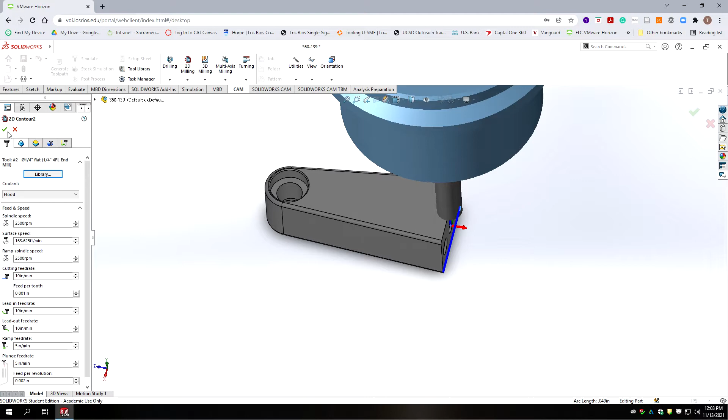Now the last features are we're going to buzz around the outside of the profile to remove material. Corner rounding end mills don't work too well, they only need to take off a minimal amount of material. So we're going to go in with this end mill and make a sharp corner for it to remove. Now the tip on our corner rounding end mill is 1/4 inch, same diameter as this cutter. So that profile will have to be spaced off a little bit, otherwise both sides of the radius cutter will be cutting on the right and left of the part, and we just want it cutting on our part.

We're going to go 2D milling, do a contour, and we're only going to cut the depth of our fillet. We want to leave the rest of the block square so that we can hold onto it. If we cut part of the way down, we'll have probably a witness mark. So if we cut the bulk of the steel from the opposite side, then it'd just be a blending thing on the radius itself.

Okay, so we're going to go to heights, and we're going to leave the first view at default, and we're going down to the contour. Let's take off 0.005, and what that will do is make sure that the very tip of the corner rounding cutter isn't touching. So we're going to do wear compensation.

We're going to do roughing passes in XY. I want to leave a substantial amount of material to remove. So our roughing passes are still going to be 0.03, but let's do 3 of them. Okay, and that'll leave a sizable channel on the one side so that the corner rounding end mill isn't cutting very much on the scrap side.

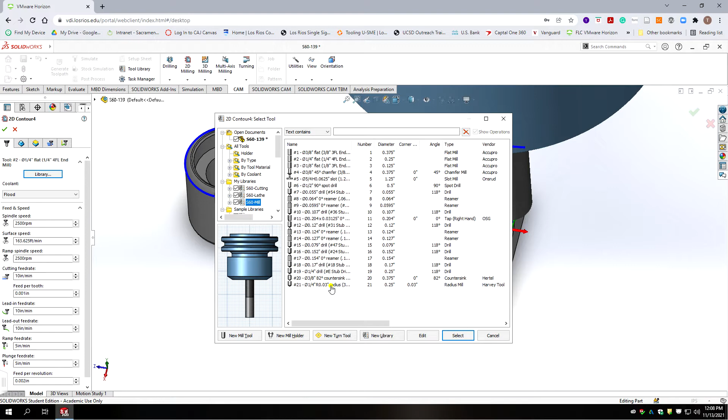Okay, so our last profile is our corner rounding end mill. So we're going to go 2D contour, we're going to select the same profile we had, but we're going to switch to our corner rounding end mill from our library, which is tool 21. Looks like we can leave the RPM where it's at.

We're going to stick with all our heights, we're going to go from stock top to the contour, we're not going to adjust any of that. We're going to use wear compensation.

Okay, and we're not going to do multiple finish passes, but we do want to put a finish pass of 0.005. Rough passes, we have to do at least one rough or we're not going to end up with anything, and we're going to just do a rough pass of 0.01. Okay, a finished pass of 5 thousandths and a rough pass of 10 thou. We're just trying to take off a little bit of the corner first before we come in with the final finish. We're only going to do one.

We're not going to do multiple depths, and we're going to turn on smoothing.

Okay, we're going to go to our next one. We're not going to do a vertical arced lead-in, and we're not going to do one that's horizontal either. We're going to come in at 0 and increase that to 0.1, so we have a lead-in that's straight coming in from the outside edge.

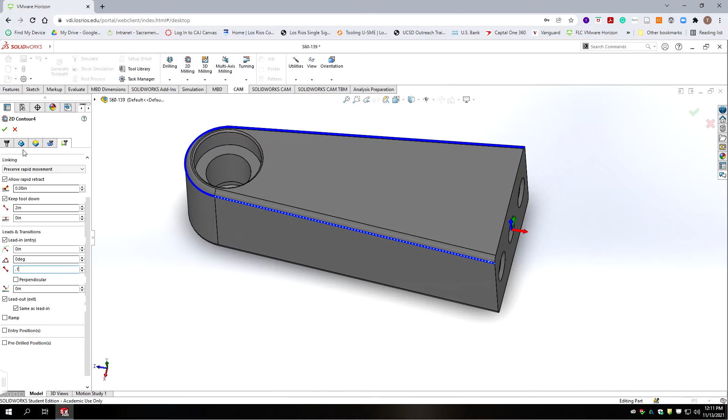Okay, we're going to accept that. And we have 2 passes, at full depth, 1 rough and 1 finish.

Alright, so let's see what we've done so far, done on our first side. So let's highlight our entire operation and do a stock simulation.

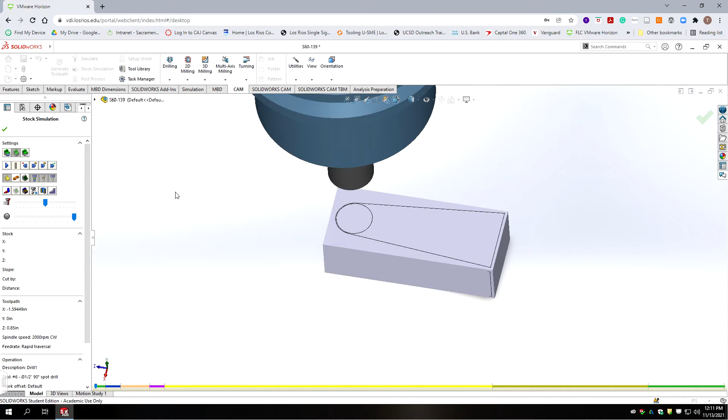Okay, we come in and do our drill. We come in and do a counterbore pocket. We do a finish on that pocket. We're machining the end.

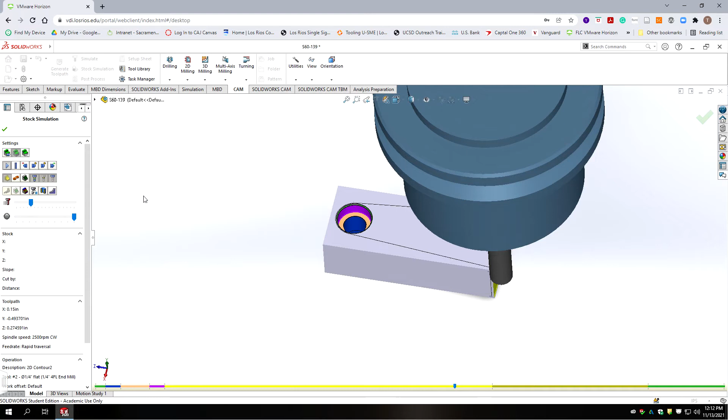I could probably be a little more aggressive there. So then it's rough cuts at the end.

Looks like it detected that my end mill flute length wasn't quite long enough. Comes in and does our radius.

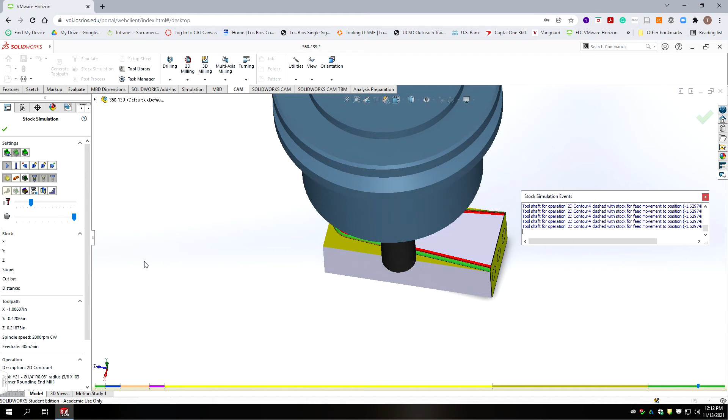Okay, so we've just finished the first side and we're going to flip the part over. We're going to use some of the same routines that we used on the first side.

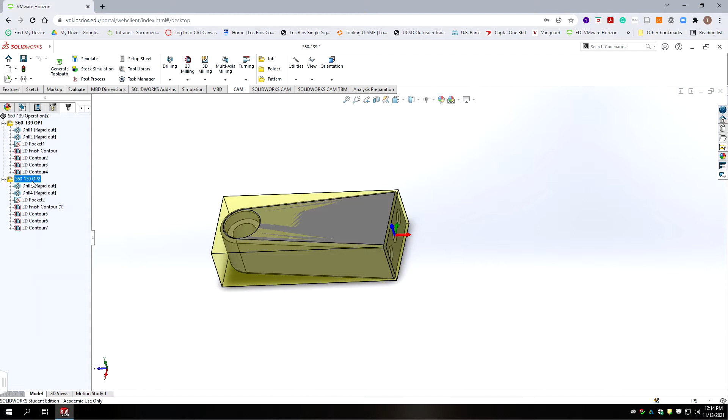So what I would suggest we do is duplicate this setup. We'll right click on it and duplicate the entire operation. Then we're going to go in and change the parameters, since this needs to be op 2.

On our stock, all sides, we're continuing from the previous job. On the right hand side, we don't have any extra material, so I believe that's the plus sign. If we set that at 0, we now have it at the size the block currently is.

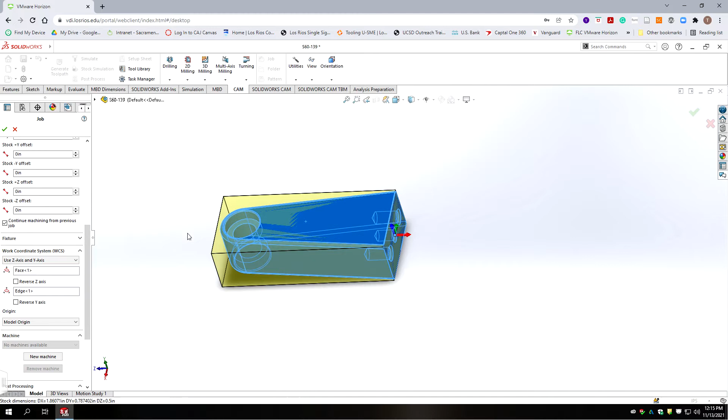Okay, now we do need to change the faces. So we're using Z-axis, and we're using the opposite side of the part as our Z-axis face. Our Y-axis face is the edge on the right.

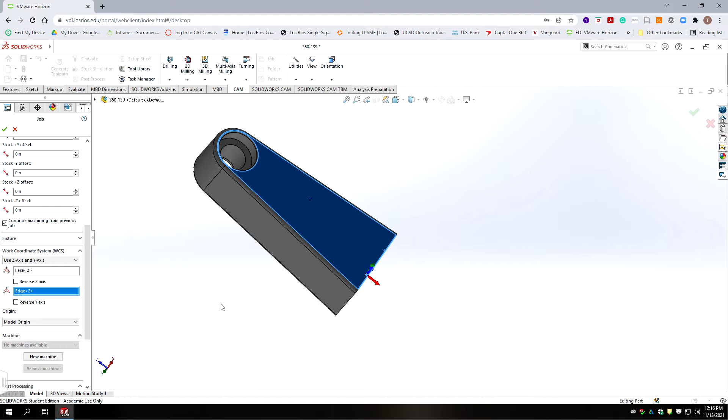And our origin from now on, we want it to be a milled feature. Because the main focal point of this part is this bore here, I would want my fixture to be picking up on the center of that.

Now, it doesn't appear that I can select an origin without creating a point there. I'm going to exit this stock for now, and I'm going to go to sketch and sketch on the plane here.

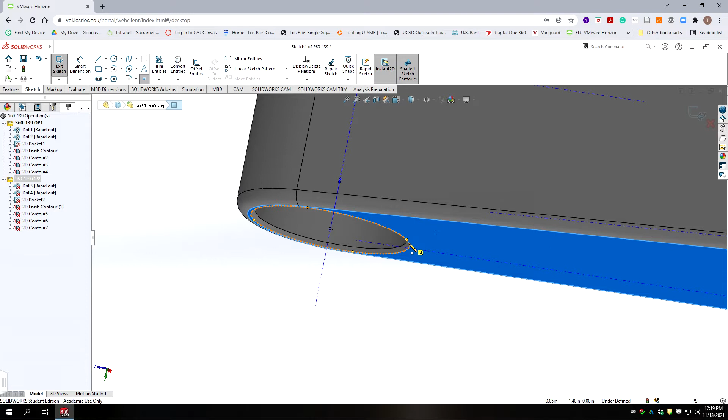I'm going to create a point and I want to pick up on the center of this, the center of the arc here that's on the bottom of the part. And if we select that center point, we can create a point.

Okay, I'm going to hide my temporary axes. And I've created now a point I can select on.

Okay, so let's go back to CAM and exit this sketch. It's asking if you want to regenerate anything. Just go ahead and hit yes.

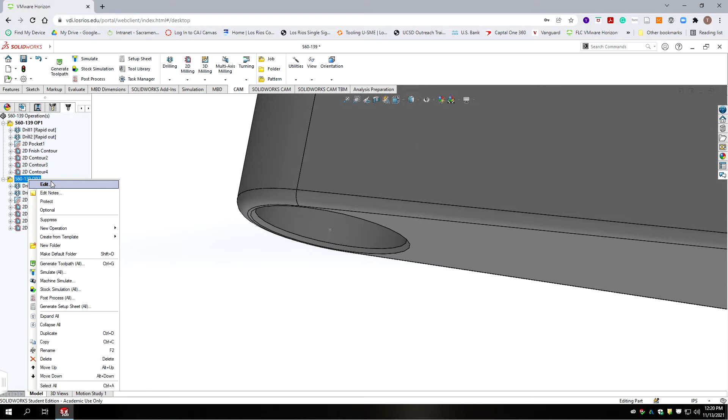And we're going to go back into our operation. Okay, I'm reselecting my model. I'm not sure why that wasn't selected.

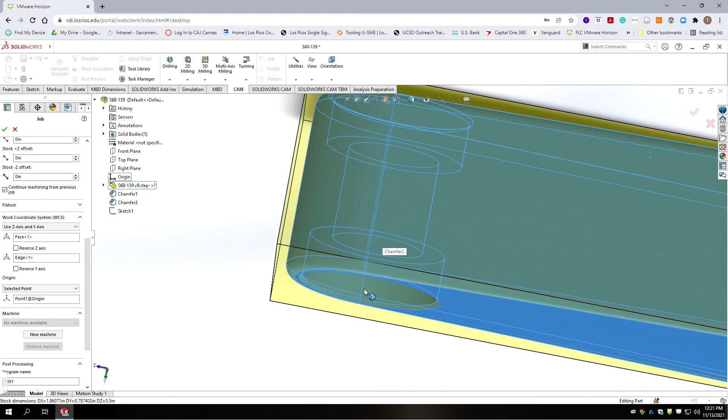Okay, so we're going to keep it on relative size box, but again we took off the point on the end. And now that we have a point, I can select the point I created in my sketch as my point of origin.

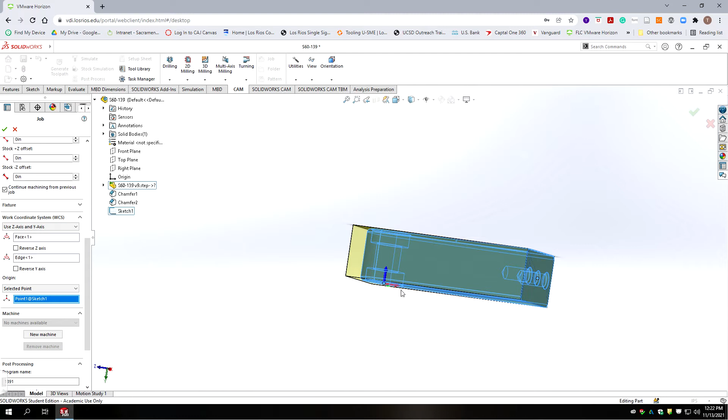Okay, so the bottom center of that bore, I can make a locating feature on a fixture so that it locates it with the origin there, and then I would use the end here that's been milled off square as our second fixture point that would lock this in place for this operation. So that way we're controlling the concentricity of the bore on the opposite side to the center of this other feature.

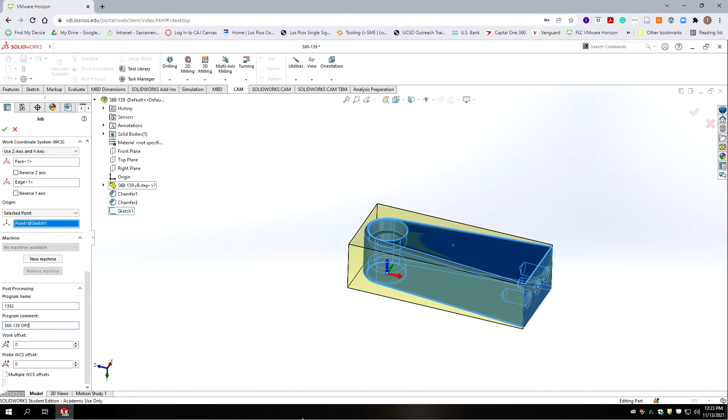Okay, all right, so now scrolling down, we're going to call this 1392. It's the second program. And our program comment should be S60-139 op2. We'll leave it at that. We'll hit OK.

Okay, so now we're going to work on these routines. So they're all drilling in from the opposite side because the program was on the opposite side. And we're going to keep the countersink geometry.

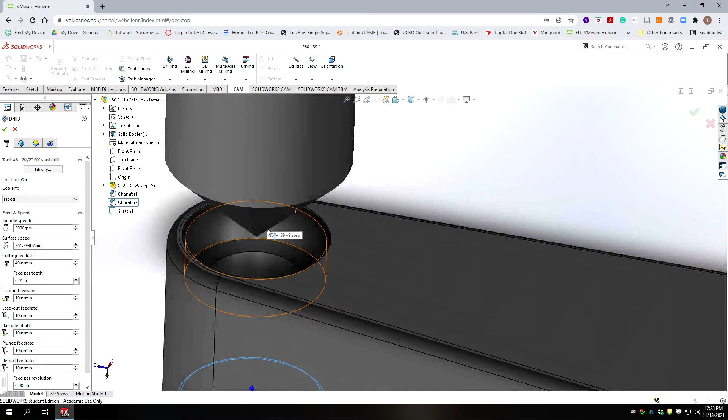So we can go ahead and select that, and we select the countersink on the opposite side. And we're going to get rid of face 1, so we're just drilling on face 2. So we accept that. Now it's really just putting the chamfer in.

We've already got the 1/4 inch holes drilled all the way through, but this will add this chamfer lead-in that helps the bearing press in. Okay, and we don't need the 1/4 inch drill, so we can delete that routine.

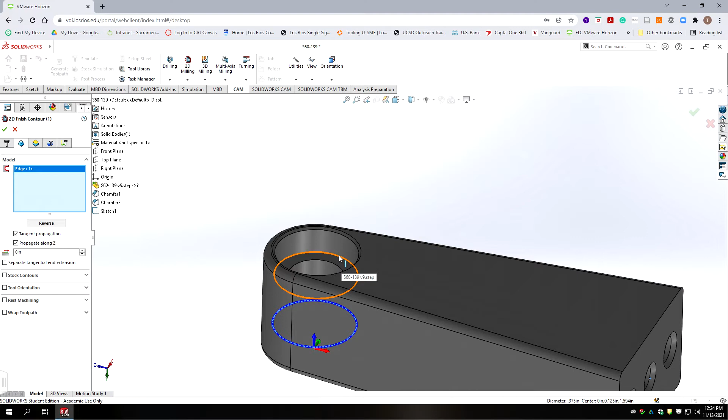And then we have a pocket command, so we're going to recycle that. We're going to go edit. And then we're going to do the same thing with our finish contour. We're going to delete the edge we have. I want an edge.

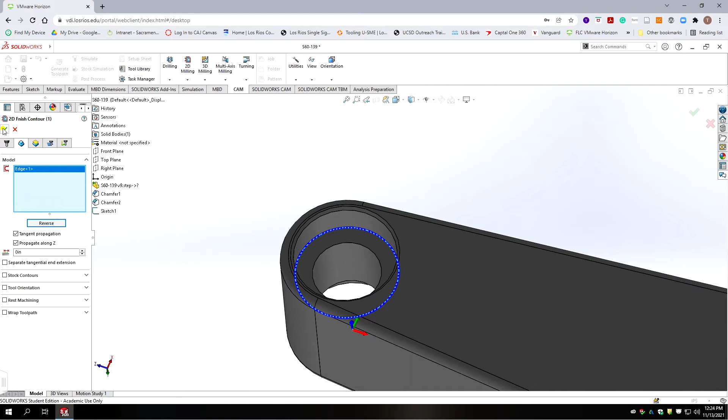Okay, we're going to accept that at default. And it looks like we got a problem here. It's trying to cut the outside. Let's try this again. Edit. We've got that selected. We're going to reverse direction and try it again. There we go. Now we got the inside.

Now we're going to go to contour 5. What was contour 5? That cut the end of our piece. Okay, so the contour 5 at the end we don't need. We've already milled that off.

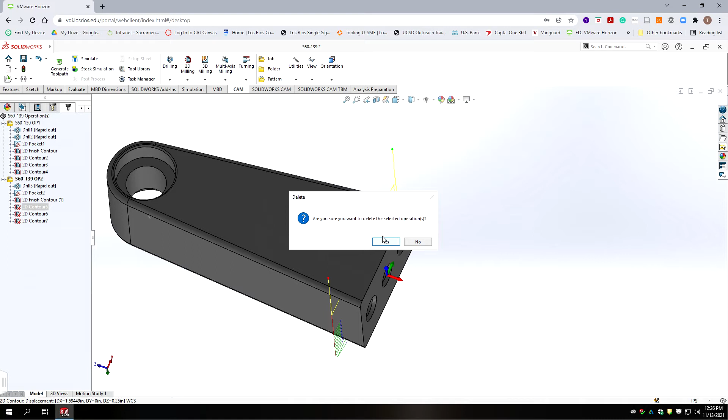And now we want to recycle contour 6, which goes around the outside edge. Now, what we're going to do is we're actually going to use the same edge we selected, and then we're going to add roughing cuts. So we're going to go edit.

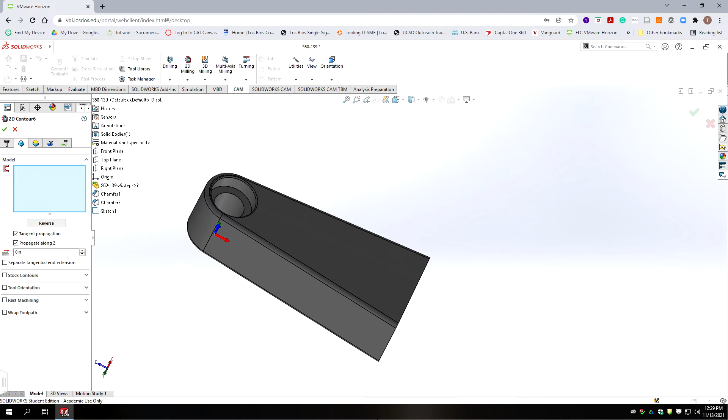Go to geometry, we're going to delete this edge, and we're going to try a new chain. Start here and go around.

And then we're going to go to our heights tab, and we're going to tell it we want to go from stock top to the contour. And again, we want to go maybe 5 thousandths deeper. That way we don't have any mismatch.

And we need to make sure our clamping scheme would be clear. So I'm thinking we would probably have a clamp coming in from the end. And then we'd have a pin here, possibly a bolt, shoulder bolt, holding this end in and locating it. Alright, so we should be good there.

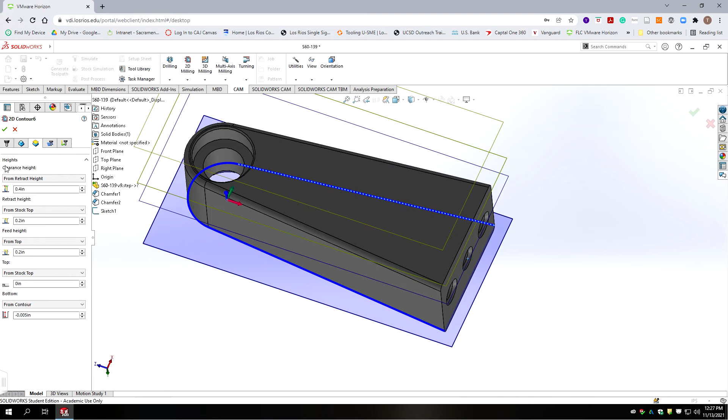We're just going to go ahead and go to the next tab, but we need to make some changes here. We're going to leave all this beginning stuff at default. We're going to do 30 thousandths roughing passes. We're not going to do that because once we cut all the way around, the outside material would go away. So we are going to do roughing passes at 30 thousandths, but we're only going to do 1 this time.

We are going to use multiple depths this time because we're going deeper. And again, we're going to go with 30 thousandths. This might be a little too conservative, but at the bottom we'll do a 0.005 pass. It's just going to be a spring pass. And we're going to finish only at the final depth. That works best in steel if you have enough flute length. We're not going to leave any stock.

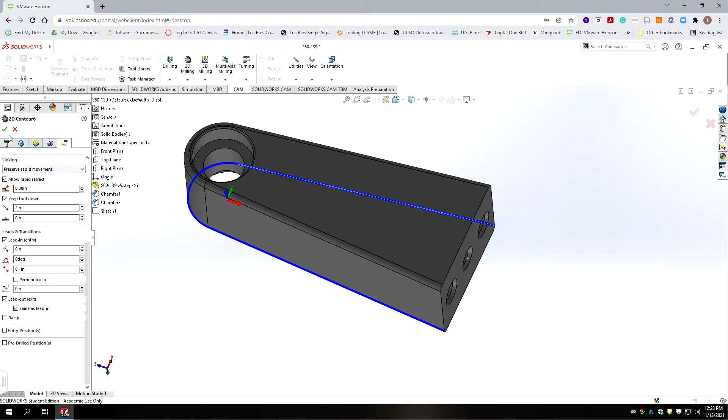We're going to go to the next tab. We can leave all this at default. We'll accept, and there we go. Okay, so we've got our rough cuts with a finish cut at the bottom.

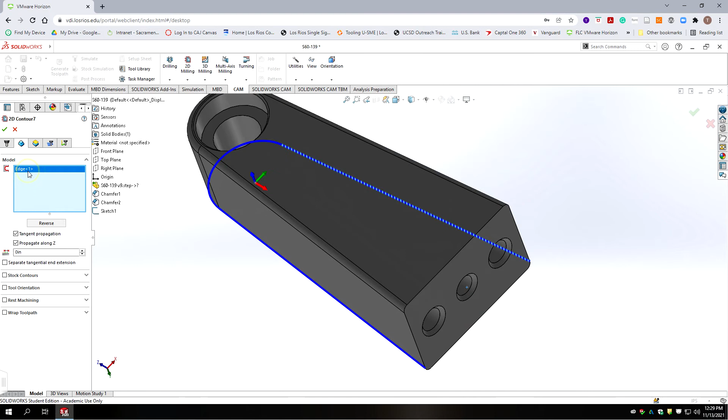Now all we need to do is our radius cutter, which right now is cutting on the inside. So we're going to go edit, and I think if we reselect the geometry it'll be fine. So let's get rid of edge 1, which we don't want anyway because we want to cut on the top of our part. And we're going to select a new edge that's going to wrap around and accept that. And there we go.

Alright, so we've recycled a lot of the code we used in the beginning. Okay, so we only have one more operation, and we're going to stand this up on end and do our machining on the drilled holes in the end. Okay, so this is going to be our last operation.

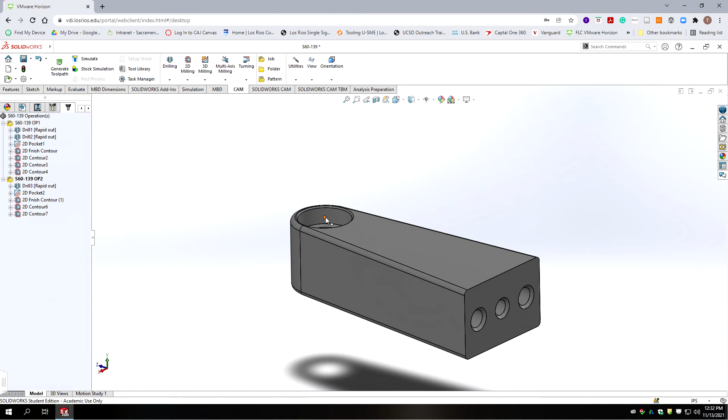Let's go ahead and orientate the block the way we would want it. And you know, we made this little point for our origin for the last operation. We want to make sure that is against the fixed jaw of the vise.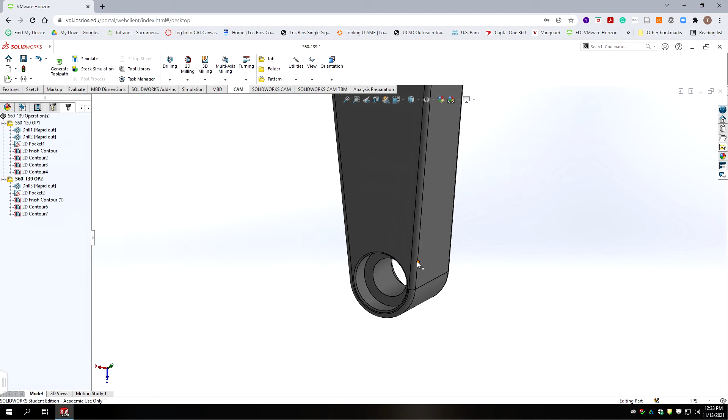If we were to mount a vise jaw and have a pinhole in it that a dowel pin could go through, if that was how we chose to fix this, this is the same edge we're keeping track of that we used on the last fixturing, which was the very first counterbore.

I know it's a little hard to visualize with a symmetrical part like this, but I'm visually orientating the part so the bottom is facing up so we can do these drilling routines.

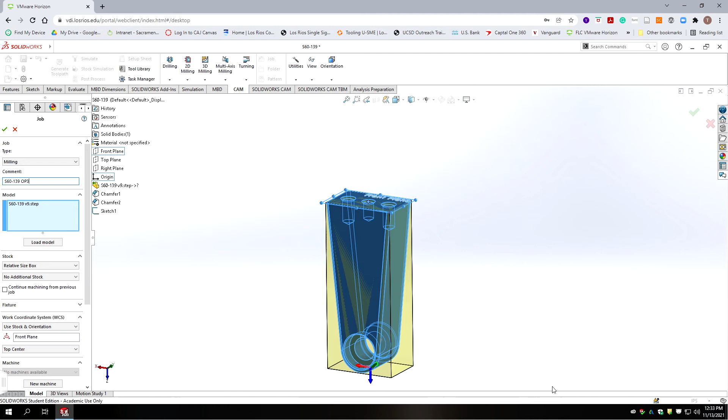We're going to create a new job folder. This one's going to be called S60-139 op 1 - I'm sorry, op 3. And we basically don't have any stock anymore.

It's going to be from Solid, and we're going to pick our Solid model. We're going to continue from the previous job. Our stock orientation is going to be Z and an X-axis.

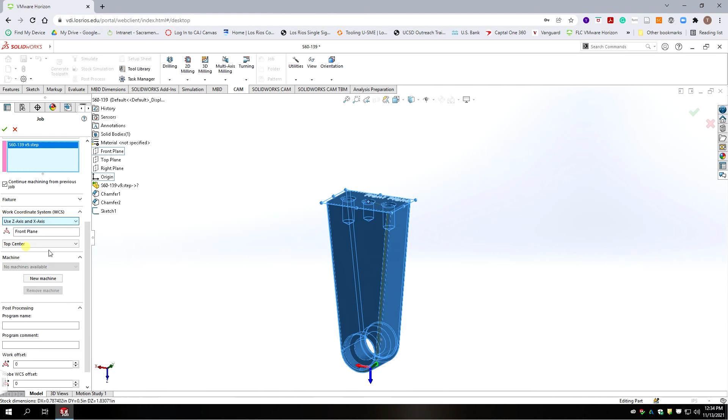We're going to select the bottom of the part for Z, and our X-axis is already pointing the direction we want, but it would be this edge here, and we reverse it. We want it pointing to the right.

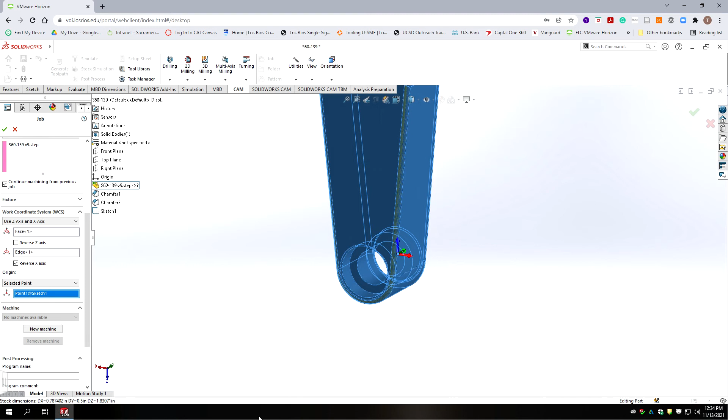Our origin placement isn't going to be stock box point, it's going to be a selected point, and it's going to be that same sketch point we made earlier. So it puts it on the center of our round machined feature that would be our tooling point.

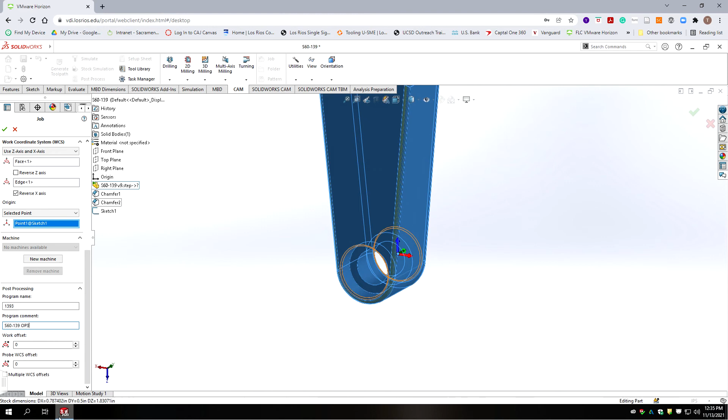Our program name is going to be 1393, and our program comment is going to be S60-139 op 3. Alright, we're going to accept that.

So the stock volume is the model itself. Technically you could have a box around it, but generally when I've machined all the outside features of it, we switch to that for collision detection.

Okay, let's change the name of our job. It's going to be S60-139 op 3.

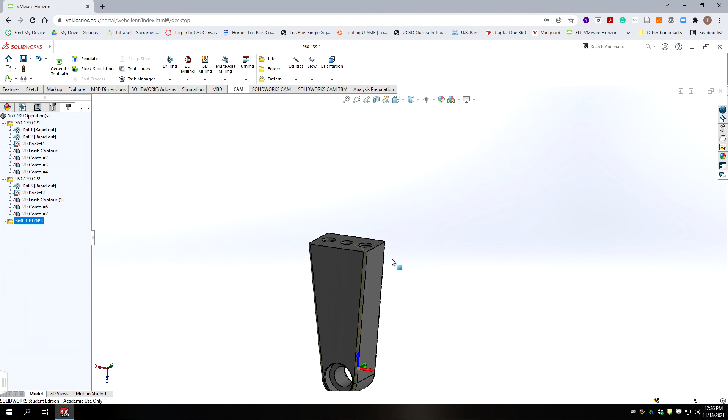I'll minimize it so I can sort them and put them in the proper order. This should go pretty quick. We're going to use spot drills, piloting drills, and then reamers and taps. So we're going to go first with our spot drill.

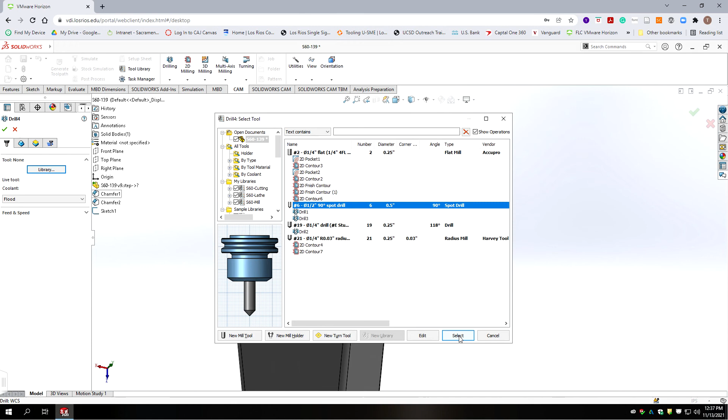We're going to go drilling, we're going to go with a drill, we're going to go to our library and grab our spot drill we've used before in this program. Our outside holes first.

We're going to go to heights, and we need to calculate how far we're going. We're going from hole top, and then the second selection is also from hole top, and we're going to go a negative distance of half the diameter of this. So we go to evaluate, measure our arc - it's 165 thousandths. So we're going to go negative 0.165 divided by 2. That'll give us the proper depth.

We're going to go to the next tab. That's fine. We do want to slow down our RPM - forgot to do that. Let's go 2,000, and we're going 10 inches a minute because we're steel.

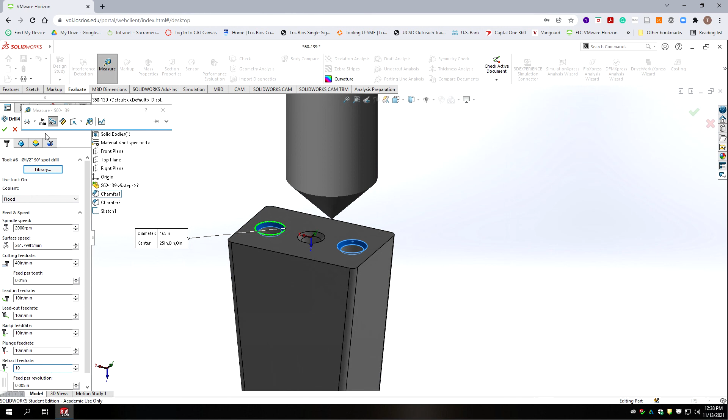Now, if we wanted to be more efficient with this, we could have set up a library by material that had these defaults already in there, but we're not making very many parts, so we're just going to go with what we got. I'm going to leave all that the same, and we're going to leave the next the same. So we hit accept, and there's our first two countersinks or edge breaks.

Now we're going to duplicate that routine, and all we're going to do is change the depth of this hole because it's smaller.

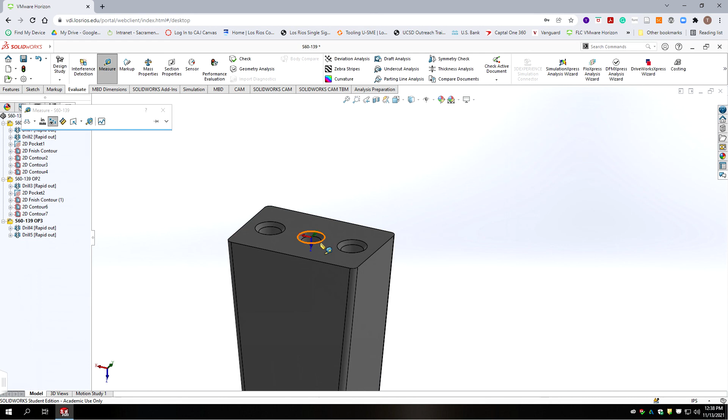So we go back to evaluate, and we're going to measure that lead-in edge, which is 149 thousandths.

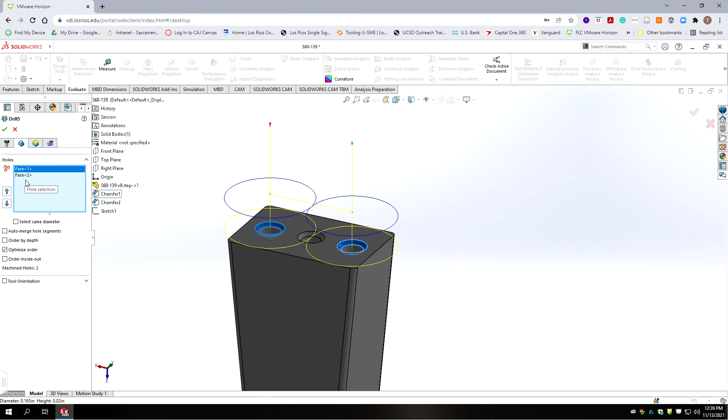And our geometry, we're going to get rid of the two faces we selected before, and we're going to select just the center hole and hit accept. There we go. So when the machine actually runs it, you're just going to see it do them all together next to each other.